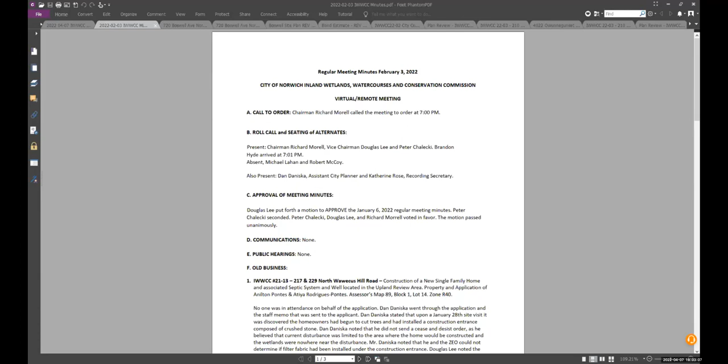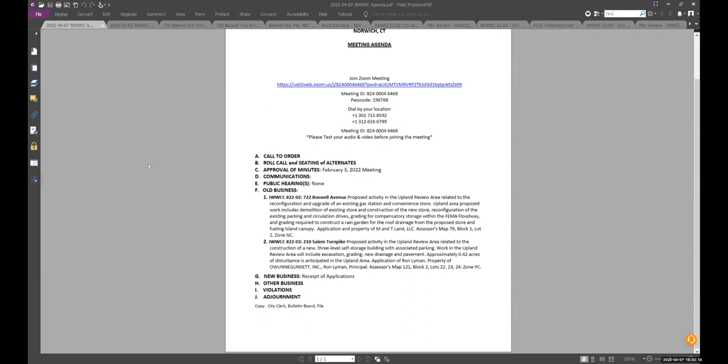None. Not tonight. Old business, IWWCC number 22-02, 722 Boswell Avenue. We have Dave McKay on the call for the applicant, if you'd like him to present.

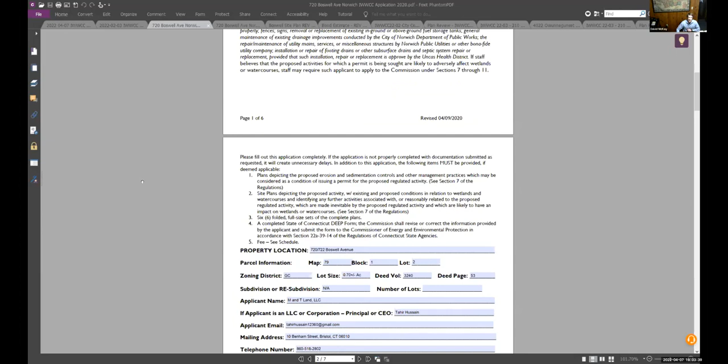Good evening. This is David McKay with Boundaries LLC, here on behalf of the applicant and property owner, M&T Land LLC. Dan, can I share my screen? Sure, go ahead. All right, I think I now will be able to do it. Yep, there we go. Okay.

So this application is for improvements to the existing fueling station and convenience store located at 722 Boswell Avenue, right here under my cursor. This is Boswell Avenue, Route 12, and this is Berkeley Street. And we're here today because there is a wetland area located on 682 Boswell Avenue. You can see right here that is separated from our property by the driveway to 690 Boswell Avenue, the Norwich Auto Car Wash.

And the upland review area from this wetland system runs right about halfway down through the middle of our property. And our proposal includes reconstructing the convenience store, increasing that size from about 590 square feet to 2,100 square feet, adding a canopy over these fueling islands, and reconfiguring the parking to reduce some of this pavement around the site and also add some landscaped islands. I'll bring up the site plan now, and we can just flip through that.

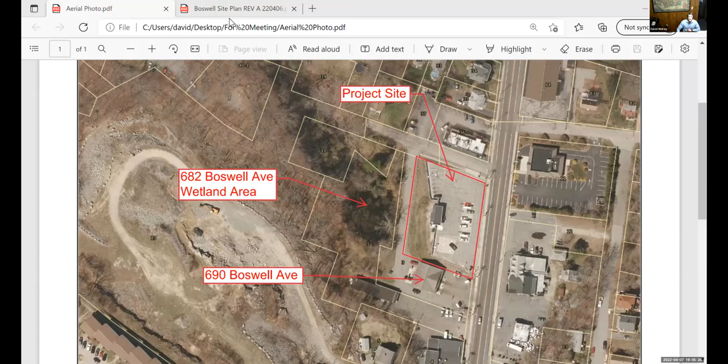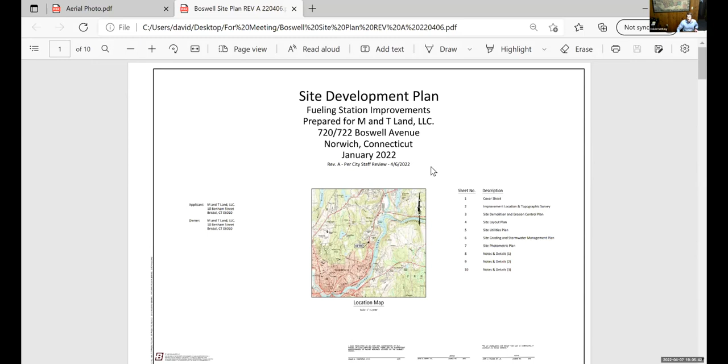Okay, so this should be the cover of our site plan. Now you'll notice this is revision A; we received some comments from Dan and from Brian Long, the city engineer, and we prepared this set of plans to address those comments. This is the existing conditions survey. You can see this gray dashed line here is the limits of the upland review area from the wetland that's located off of our property on 682 Boswell Avenue. And Boswell Avenue is right here at the bottom of the page, so a different orientation from the aerial photo I showed you.

This is our site demolition plan, which basically shows all the areas the pavement's going to be removed. So these large parking spots here within the upland review area, that pavement's going to be eliminated. The existing convenience store will be demolished. Some pavement around the front of the convenience store will be removed for the new convenience store, and then some additional pavement on the south side of the property will be removed for new landscaped islands.

Here we have the site layout plan. You can see that dashed line again is the upland review area. So work that we have within the upland review area is constructing these new parking spaces, constructing the new building footprint, and the restriped parking over here, along with landscaped islands and a rain garden that's going to be installed in the northwest corner of the property. And that's sized to take 1 inch of runoff from the new roof surface and also from the new canopy over the fueling islands. Can anybody hear me? Yes.

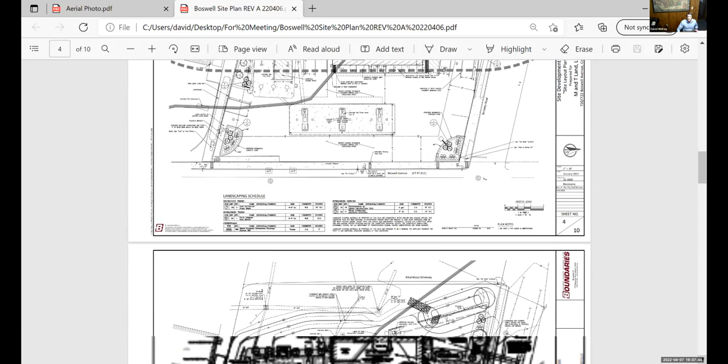All right. Now here is our site grading plan, and this is most of the activity we have in the upland review area. The grading for removing that parking area and putting the new rain garden in right here, and then grading to provide compensatory storage, because this property also is located within the FEMA floodway, which is this gray solid line here through the property. So providing compensatory storage for the new dry floodproofing of the building footprint, since the existing building doesn't have any floodproofing, and then the construction of the rain garden back here.

This is the stormwater management plan and grading plan. Again, you can see this line here is the drainage header coming from the canopy roof drainage, and then continuing around the back of the building and draining into the rain garden. So that'll take runoff from the roof drainage, from the roof canopy, fill up in the rain garden, which is sized to hold the 1 inch water quality volume, run through a riprap spillway into the existing catch basin that's located on the property. And this drainage system flows away from the wetlands and ends up crossing Boswell Avenue off-site.

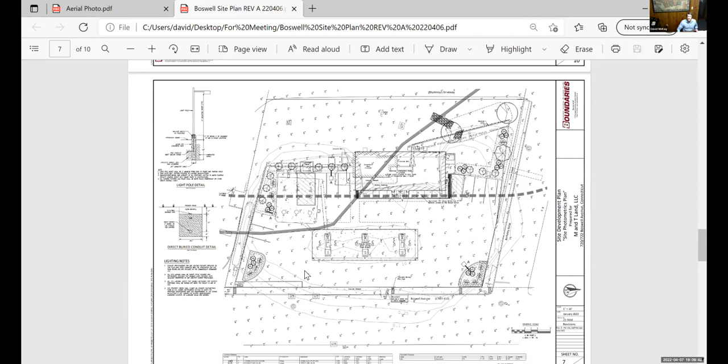And then drainage from the parking lot, that's going to stay the same as it is now, although there is less impervious area going to this catch basin in the corner of the property, which also connects to this drainage system and runs off the property. So that's no proposed change from existing conditions. And then this is just the lighting plan with additional details of the landscaping.

And I'm going to scroll back up to the demolition plan because I did not mention the silt fence. There's a proposed row of silt fence at the limits of grading that's going to extend along the edge of that driveway and along the limits of grading. So any runoff from our grading areas will be stopped by the silt fence before it gets to the driveway, which then would prevent it from getting to the wetlands.

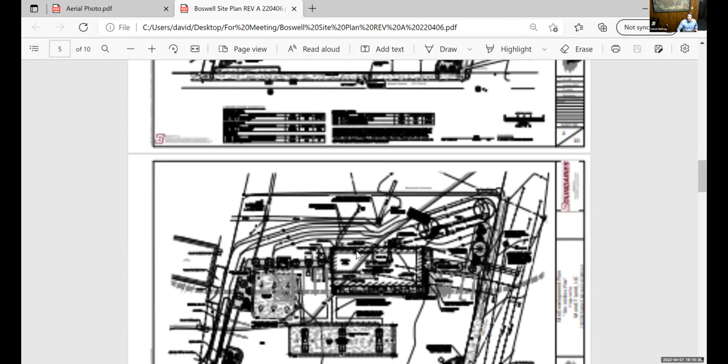And then we also have an intermediate barrier of silt fence along the top of the slope, just to control any of these work areas from getting down into the more steeply sloped area. So stop that sediment in the flatter areas. And now we just have our standard notes and details with the erosion and sedimentation control notes, demonstrating that the fuel delivery trucks are able to access the site, and then details for our sediment fence and for the inlet protection that will be installed in the 3 catch basins on the property.

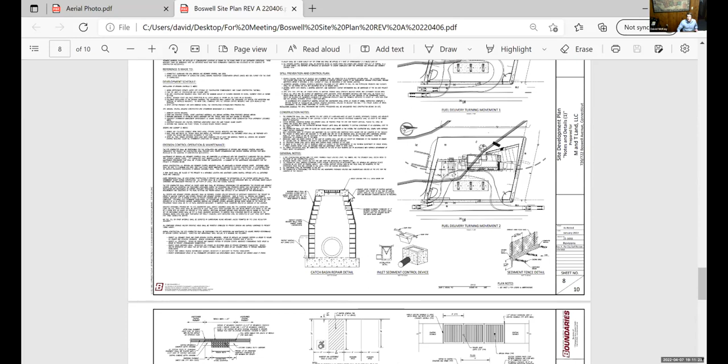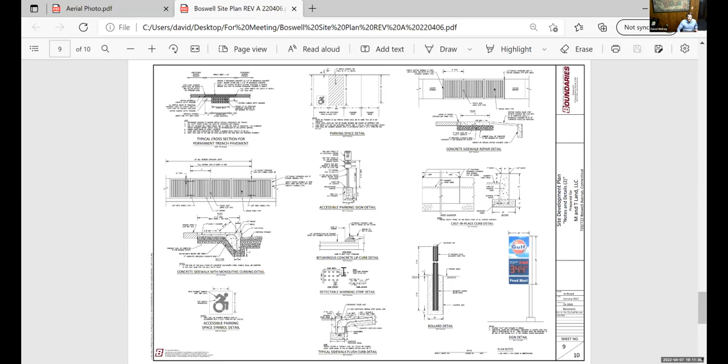And also, in response to one of Brian Long's comments, we've added this detail here for repairing the existing catch basin to the rear of the property. The top couple courses of concrete block are loose at this time, so we're incorporating into this project to remove the catch basin frame and grate and reset that top couple courses of concrete block with new mortar, and then set the frame. And then additional details for our site improvements, the new sidewalks, line striping, signage, curbing, and the existing gas station sign and logo. And then utilities details and landscaping details.

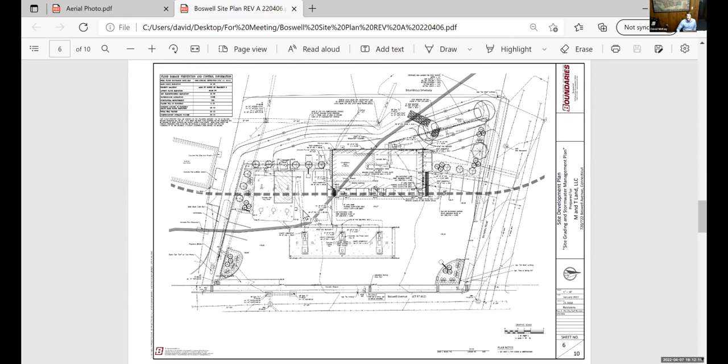So I'll scroll back up here to our grading plan, and that will end my presentation. I'd be happy to answer any questions. Doug, do you have any questions? No, I don't have any questions of the applicant.

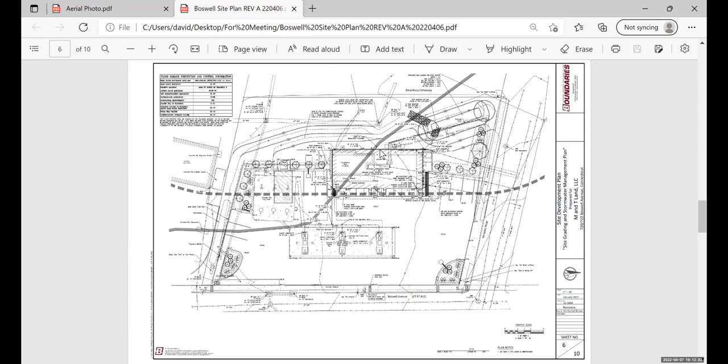This is Brandon. Yep, this is Brandon. I do have a couple quick ones. It was really hard for me to read the topography because I'm on a smaller screen here tonight. I guess my biggest question is, is there an increase in impervious surface overall on the site? No, there's a decrease of about 3,000 square feet overall on the property, and about 2,500 square feet of that impervious that's being removed is located in the upland review area. So we have a 2,500 square foot reduction within the upland review area itself.

That's very good then. And also the topography, how much of the parking lot goes towards the back of the property versus towards Boswell Ave? The parking lot, pretty much all of it drains from the north to the south, and then it's collected in this concrete gutter that runs to the catch basin. So that is going to stay the same as it is now, except for the reduction in impervious area for the landscaped islands, and then also the new canopy over the pumps will prevent the runoff from getting onto the concrete fueling pad, and that runoff will then go out to our rain garden.

That's my only questions. Overall, looks like a great improvement to the site, and thank you for your work on this, David. You're welcome. Thank you.

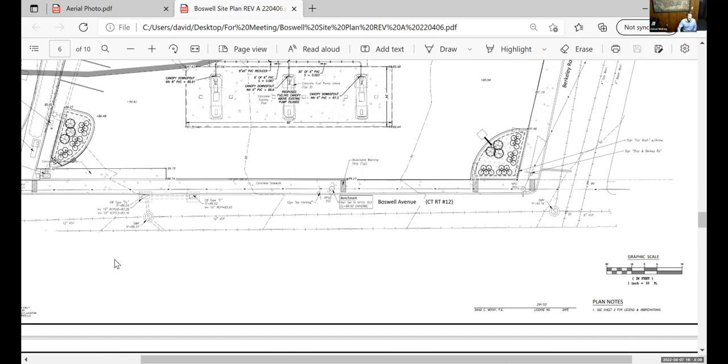Dave, are you aware just how much flooding occurs in this area? Anecdotally, we've been told that basically flooding gets up to about this portion of the property, and then based on the topography would wrap around the rear of the property. Yeah, that rear road will be underwater. Yes, that's my understanding. About a foot of water will be running through that car wash on a spring event and wash through Boswell Avenue.

So I'm not so sure how that catch basin at the rear of your property, which drains into that culvert underneath, how effective that's going to be when that backs up. Yes, I mean, I guess it's an existing condition, and the work that we're doing is to reduce impervious area, and then the building is going to be dry flood proofed to protect the building itself. But yeah, we do understand that this area behind the building does flood, and there would be a period of time that this catch basin is not going to be effective. It's a challenging proposition here, this piece of property.

Any other comments or questions, Michael? I guess not. Peter, I guess not. In your notes, Dan, you mentioned comments from the city engineer. Should we hear what those comments were? Sure. Dave, I don't know if you want to go through how you addressed all of them in the updated plan. That might be easier. No problem.

So Brian had 4 comments for us. Comment number 1 was regarding an anti-tracking pad that we had included in the bond estimate for the property, but it was not included on the site plans themselves. So he either wanted it shown on the site plans or removed from the bond estimate if it wasn't going to be utilized. I'm just scrolling up to the demolition sheet here. So basically, our existing curb cuts are going to stay the same, and the pavement in these areas is not going to be disturbed at this time. So any road vehicles that enter and exit the site during construction aren't going to be leaving a paved area. So in accordance with Brian's comment, we removed the anti-tracking pad from the bond estimate and provided him an updated bond estimate to review.

Comment number 2 was regarding our drainage into the rain garden, our roof drainage. Originally I had 6-inch diameter pipes laid at 1% slope coming out at the bottom of the rain garden. And Brian brought up a concern with the potential for that pipe to plug up since it was located below the spillway that would fill up during large storm events and then drain to the catch basin. So in our revised plan, I increased the pipe diameter from 6 inches to 8 inches, so we were able to run this pipe at 0.5% slope. And now the outlet is set above the elevation of the spillway, so there's no potential for clogging anymore. So that's comment number 2.

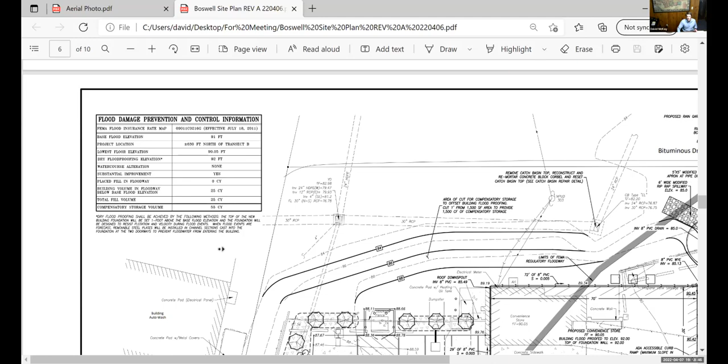Comment number 3 is the method of floodproofing for the proposed building should be indicated. The way this building can be floodproofed, it's a 2-part. One, the foundation wall is going to be poured 1 foot above the base flood elevation, which is 91 in this area. So the top of the foundation wall is going to be 92. I added that note to the building call out, and then also on our flood damage prevention table, I added a description of the dry floodproofing regarding the foundation, and then regarding the removable plates that are going to be placed in channel sections that are cast into the door frames. And those form a barrier to prevent floodwaters from entering into the building.

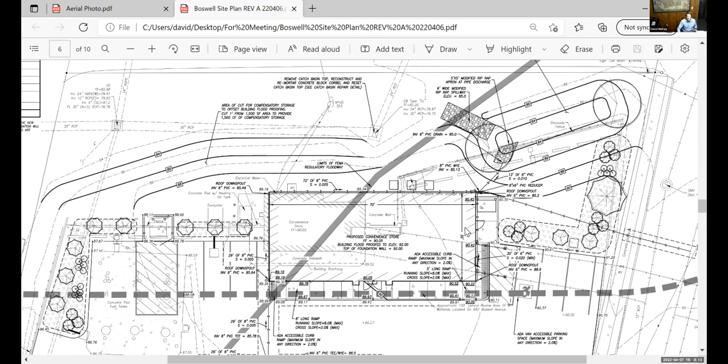So they actually have channel sections that are cast into the frame along the door, and these steel plates are dropped into those sections. So if floodwaters were to get up in this area, they wouldn't be able to enter the building. So between those 2 parts, the building is dry flood-proofed.

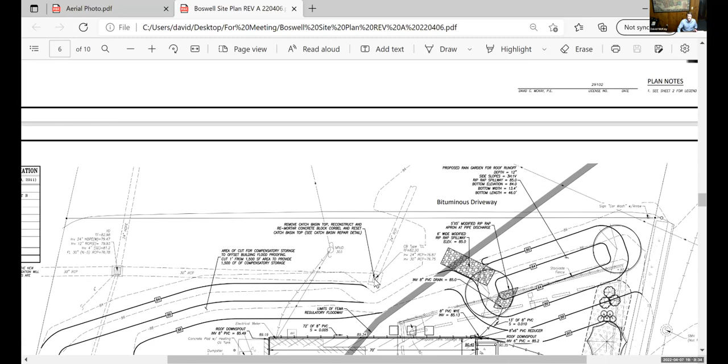And then Brian's final comment is regarding the catch basin I mentioned, which we added that repair detail to. So one part of that is to repair the catch basin where the concrete blocks are loose and starting to fall in. And then the other part is removing an existing tree that is immediately next to the catch basin. On the slope here, you can see the tree right under my cursor. The catch basin's here. So Brian recommended that we remove that tree to protect that catch basin from any further damage or root intrusion. So we added that to the plan as well. And that addresses Brian's comments on the plan. Thank you very much, David.

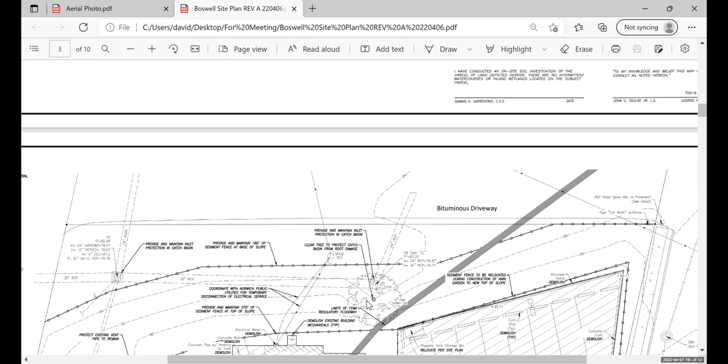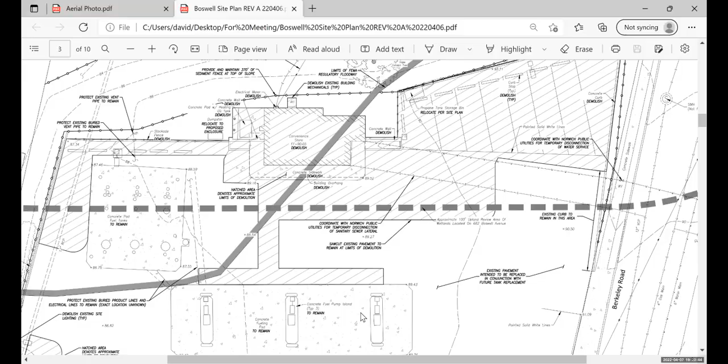You're welcome. Any other questions or comments? I'd just add that my only other comment was adding the soil scientist's signature to the plan, which they also have on the cover sheet now. So all my comments and the engineer's comments have been addressed. Very good. First, we have to review and see if it is necessary to have a public hearing. Do I hear anyone make a motion? This is Brandon. I move the IWWCC number 22-02 is not a significant activity, therefore does not require a public hearing.

Do I hear a second? I second. Good. Okay, all in favor? Doug, aye. Pete, aye. Brandon, aye. Michael, aye. Any opposed? Hearing none, so moved.

Would anyone care to move IWWCC number 22-02? This is Brandon. I move to approve IWWCC number 22-02, with all the bullet points brought up by Dan to be included. Oh, absolutely. Yep, as corrected and addressed by David. Yes, thank you. This is Doug, second. All in favor? Doug, aye. Aye. Pete, aye. Any opposed? Hearing none, so moved. Thank you, David, very much.

Thank you for your time this evening. Take care.

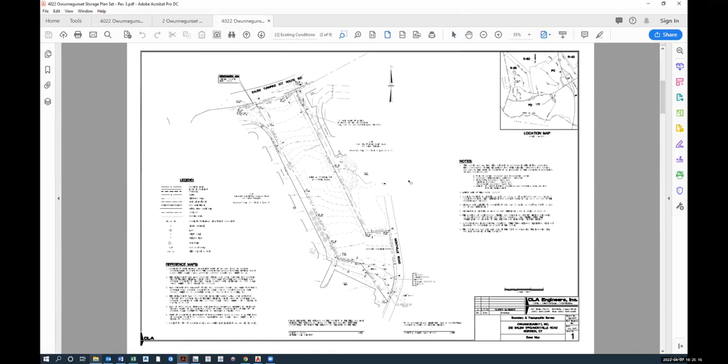So the project proposes a new 3-level self-storage building with associated parking. Access to the development will be from Salem Turnpike, and vehicles can enter and exit from this point of entrance here. And they can also exit the site via the south portion of the parcel on Montville Road. The approximate area of disturbance on the site is about 1.7 acres. This is the erosion and sediment control plan. You'll see that the site during construction would incorporate a temporary sediment trap, which will be used during construction to intercept the runoff from the site. There'll be a storm swale running down the westerly length of the parcel to capture the runoff and then discharge it into the sediment trap.

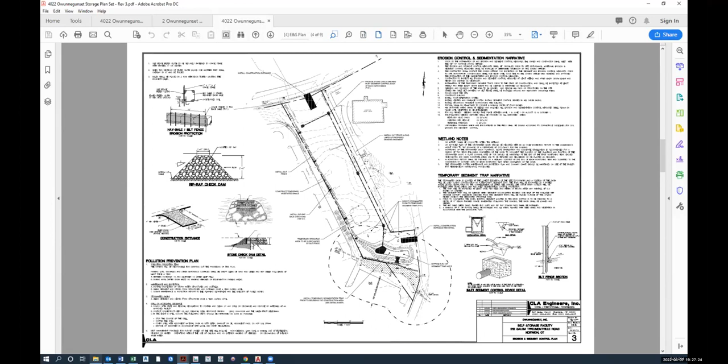The upland area of the wetlands will be protected by a silt fence and hay bale backed silt fence. So no construction work will occur within the wetlands or the watercourses. And as Dan mentioned, about 0.42 acres of the upland review area will be disturbed. Construction is expected to take about a year, I would imagine, and is planned to commence this year, subject to planning, zoning, and an archaeological review. Stormwater management design has been prepared to ensure there is no increase in runoff rates or volume. And our certified soil scientist has concluded that there will be no temporary or post-construction impacts to the wetlands.

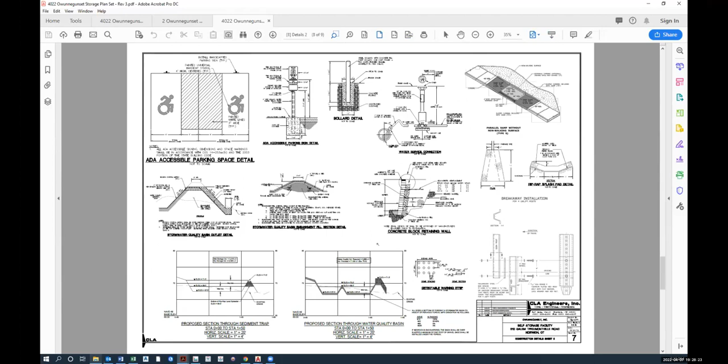And because we're connecting utilities to the state roadway, Route 82, we have some Connecticut standard details for pavement reinstatement. That ends my presentation. Does the commission have any questions? Any comments, Dan?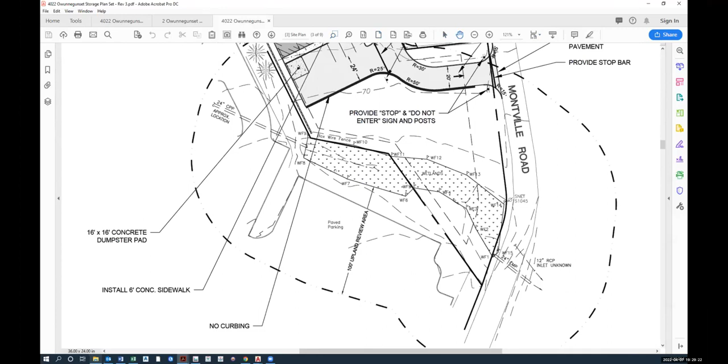This is Brandon. I did have a couple questions. The southern end of the parking lot, is that a curb delineating the grass area? Yes. Yes, that area there, is that curbed? No, what is going to happen is this is going to sheet flow off, and we have a note here saying no curbing. And actually, this is going to be a trench. Let me just scroll quickly to the...

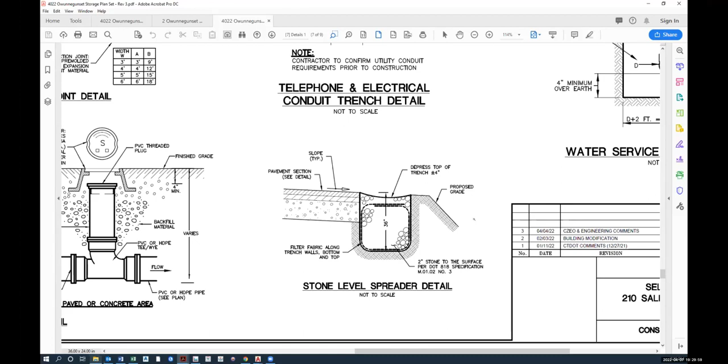It's a stone level spreader, and the detail for that is here. So pavement runoff will come into a 3-foot stone level spreader just to protect the grassed area from collecting sediment at the edge, and then it'll overflow and then downstream into the basin. So no curb, to answer your question.

Okay, thank you. And then is the predominant grade still going out to Montville Road? How much of the water do you think would actually make it out to Montville Road versus across that spreader from that parking lot? I would imagine, the way the site is graded, all of the water north of where my cursor is is going to enter the pond.

It's going to get collected on the roadway through the drainage system running down the road, and all the runoff from the roof is being collected and piped into that structure there. So everything's being channeled into the basin. All this is sheet flowing off here, so only a very small amount here, just to the east of the basin, is going to be actually discharging to Montville Road.

Okay, thank you. And that's a retention or detention basin? It has to be detention because we're so close to the water level. There's just no separation between the existing groundwater level there and the basin bottom. It will infiltrate over time. Okay, thank you.

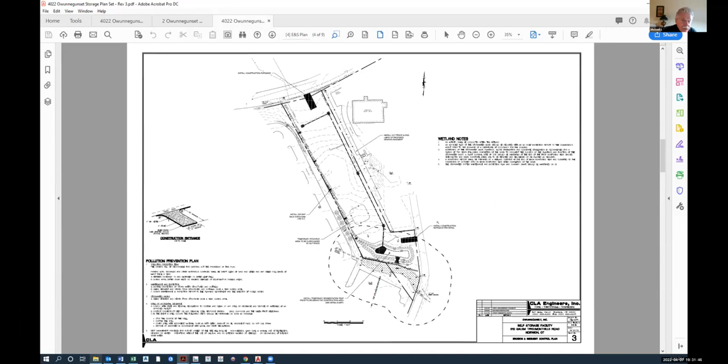Any further questions? Can I ask a question? Yes. Can you show me in more detail the entrance to this place off of the Salem Turnpike? Is there any way you can enlarge that? Okay. So I thought that the presentation said that it was a cutoff off of the Walmart parking lot. No, there's no access through the Walmart parking lot.

No, Mike, what's happening now is when we went out for our field visit, people are hopping the curb from the Walmart parking lot and driving through the bottom portion of this parcel to get to Montville Road. So my suggestion was to put a barrier up in the meantime to prevent that from happening, because where the ruts are happening is relatively close to the wetlands.

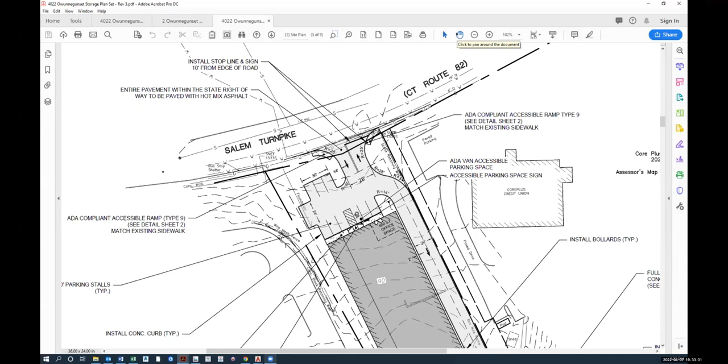Okay. So it has its own separate entrance. It's not coming off of the Walmart parking lot. It's not. People are just using it for some reason now. Okay. As a cut through. I'm assuming to avoid the traffic light. Okay. Anyone else? We must determine whether or not this is something that needs to go before a public hearing.

Dan, I just have a quick question. I'm sorry. The size of that detention basin for the amount of impervious surface, obviously your department looked at that and it's adequate. We looked at it and Brian had a number of comments, and I believe, Darren, the set you're showing now addresses all of his comments as well. Yeah, we have addressed those comments, yes.

So to answer you, Brandon, I think everything we had concerns with from a wetlands perspective has been addressed. Thank you. I apologize, I didn't have time to go through all the comments. Appreciate it. Thank you.

If no further questions or comments, is there a motion on the table? I would make a motion that I don't believe that there's a significant impact here that would require a public hearing. This is Doug, second. All in favor? Doug, aye. Pete, aye. Brandon, aye. Any opposed? Hearing none, so moved. Thank you very much, Darren.

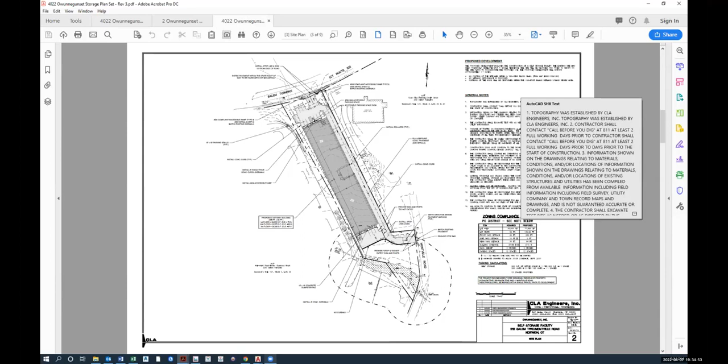Thank you, gentlemen. Good evening.

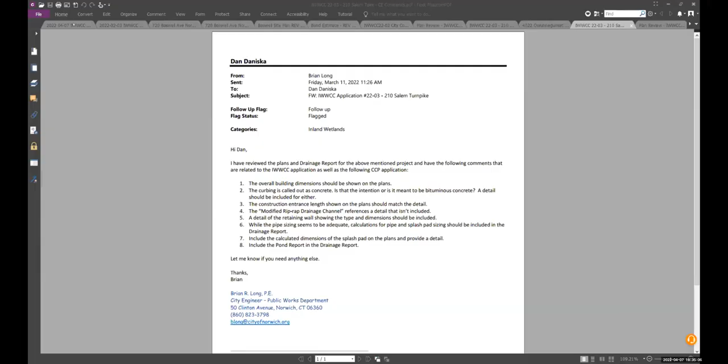Now we have a motion on whether we want to approve or not IWWCC number 22-03. I would move approval with the conditions that are set out in the recommendations by the planning commission. This is Doug, second. All in favor? Doug, aye. Pete, aye. Michael, aye. Brandon, aye. That's unanimous. So moved. Thank you very much. Thank you. Dan, you have some new business for us?

Yes, we have some new applications, 22-04, which is a public utilities project in the vicinity of Wawecus Street, water main work. So if you want to act on them separately to receive them and table them, the second one is a little more discussion. Someone would like to introduce a motion to table IWWCC 22-04. Brandon, I move to table IWWCC number 22-04 to the next meeting.